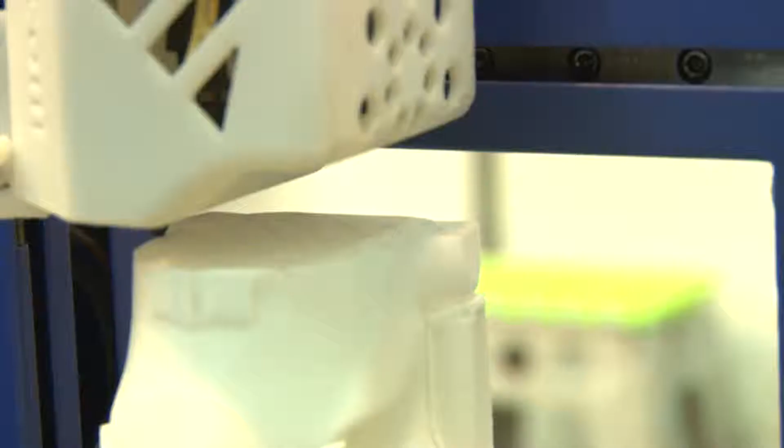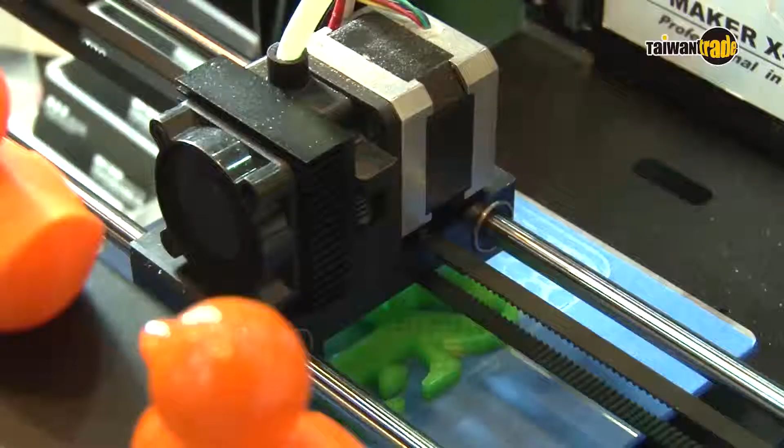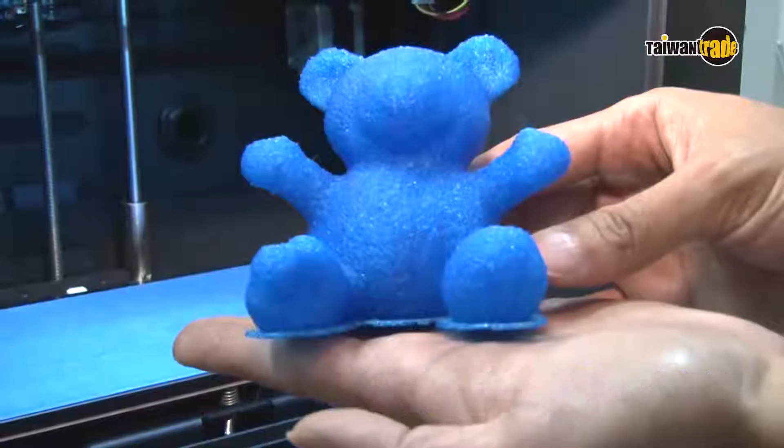3D printing technology's global popularity is actually due to economic factors. The technology itself has been in development for 20 to 30 years and is a key trend within globalization. Many countries exist to create employment for their people, and the best way to do that is through manufacturing.

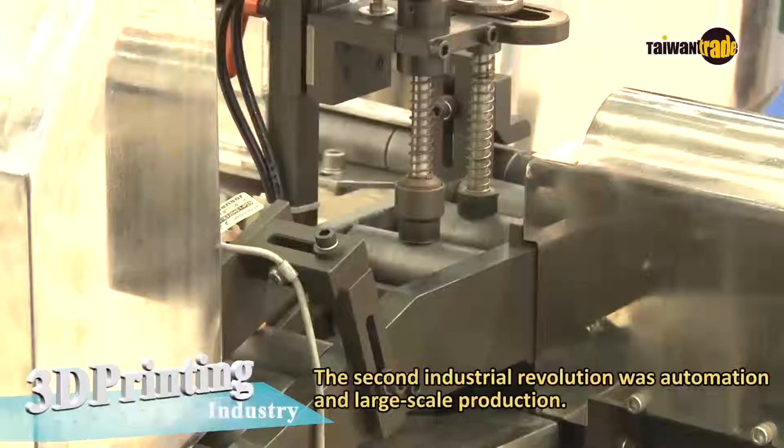The second industrial revolution was automation and large-scale production. Components are very similar to each other, so they are produced in the world's factory, like the mobile phone. But take false teeth - as every tooth has a different function, it is more suited to local production. 3D printing can completely automate the production of different components.

Manufacturing can also take place anywhere to provide local job opportunities. That is why it has so much global support - governments all want to provide their people with the most effective job opportunities.

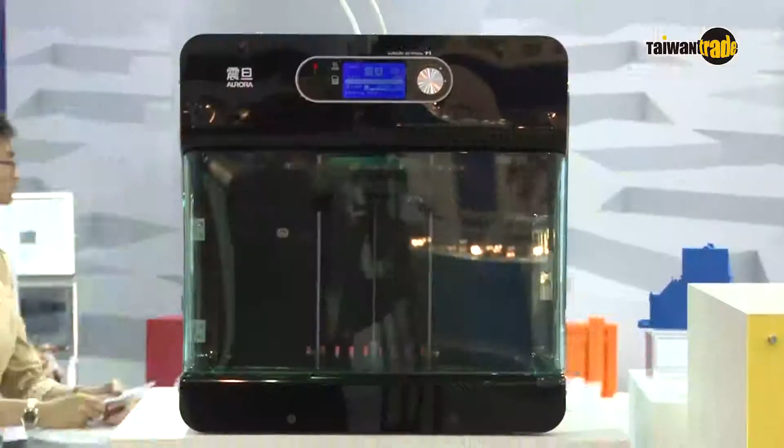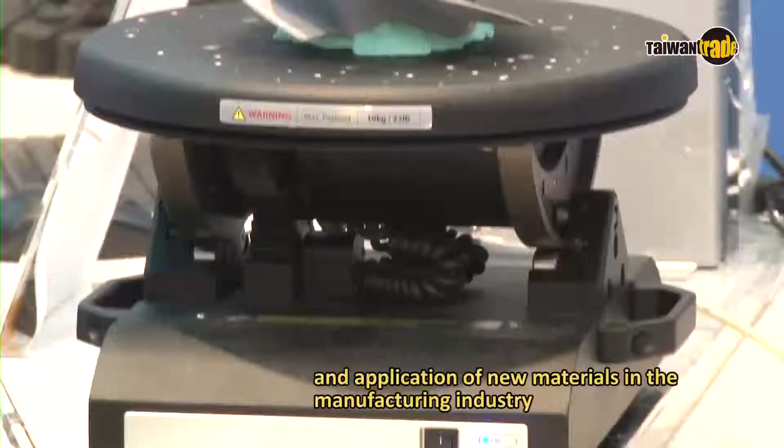Once the manufacturing industry shifts away from economies of scale, the digitization, socialization, the uniqueness of products, and application of new materials in the manufacturing industry will bring on a third industrial revolution. 3D printing technology will play a critical role in this change.

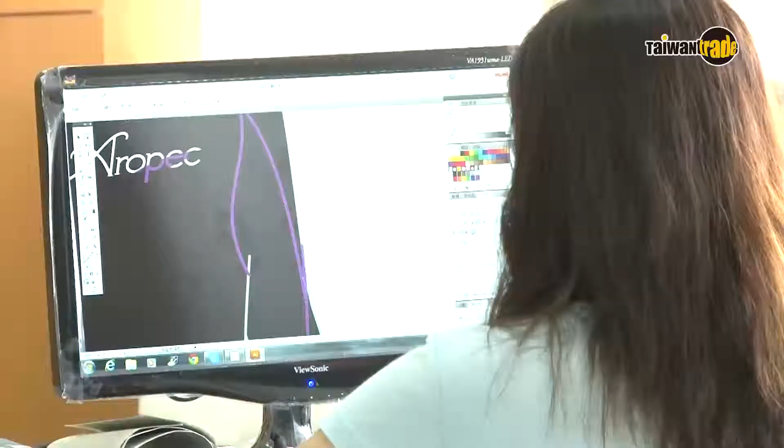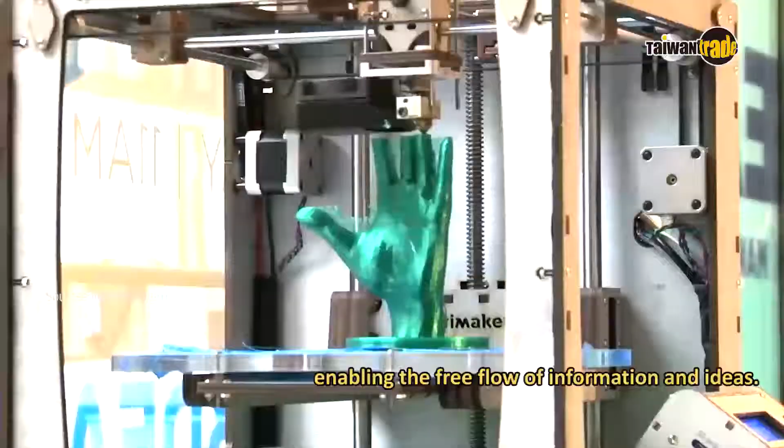During the information digitization age 20 years ago, the printer allowed data compiled on computers to be printed, enabling the free flow of information and ideas. Today, all industrial and creative products can now be given shape more quickly and more precisely through 3D printing by changing the printing material. By turning customization into self-manufacturing, everyone can now manufacture their own ideas.

We are a distributor for 3D scanning and printing technologies. Our customers are industries such as automotive, footwear, jewelry, and toys. Most of the demand is for industrial products. We have been in this industry for 18 years, and the market has kept growing steadily. The digitization of manufacturing means we already have 3D files, models, processing, and manufacturing.

In the past, parents sent their kids off to daycare or creative hubs to play with dough or Lego. Today's kids are practically born with a tablet in hand, and they play with so-called digital Lego and dough. Once all creativity is digitized, an output unit for digital creativity is needed, and that is where the 3D printer comes in. Our situation today is similar to 20 years ago.

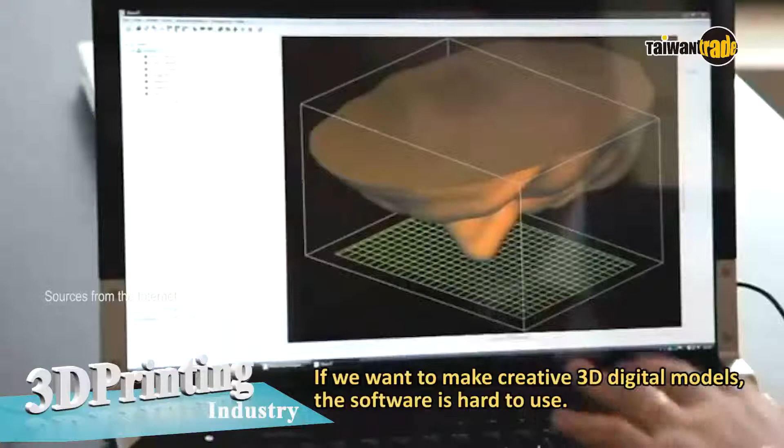If we want to make creative 3D digital models, the software is hard to use. This makes digitizing our ideas very difficult. When there was no output device for ideas, most people did not bother with making 3D digital models. Now that there is a need, we realize we do not have all the tools.

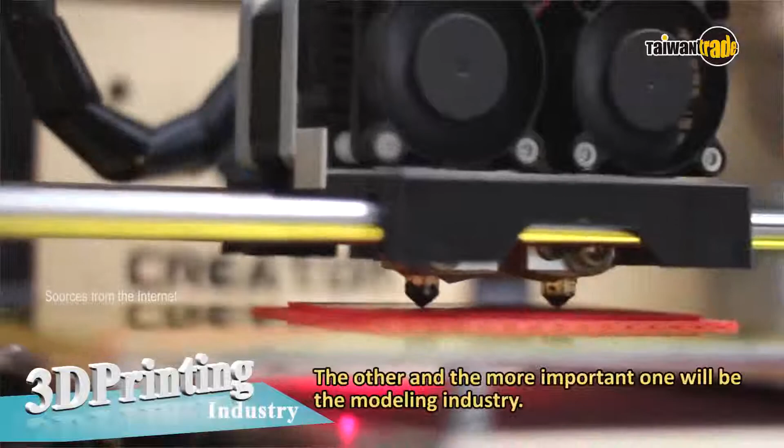So for the hottest industries in the next 5 years, we predict one will be 3D printers. The other, and more important one, will be the modeling industry. Apple has a patent for something similar - you draw a circle on the iPad, then pull it up by touching 3-4 points to make a cylinder. Pull it into a single point and you get a cone. That's basically playing with dough and Lego. Apple is already working on what we call rapid modeling.

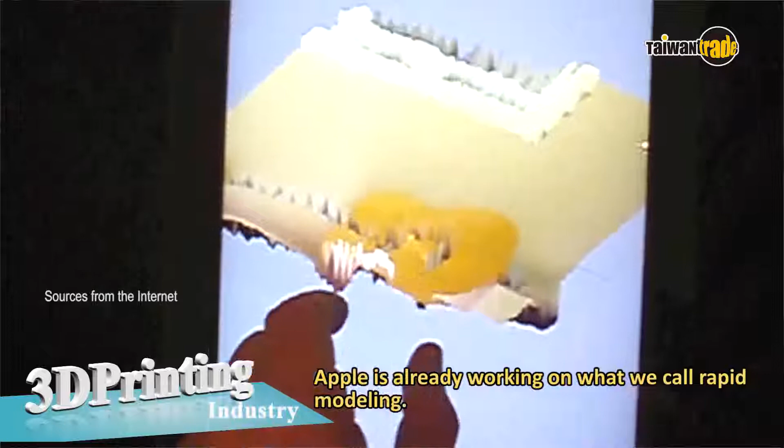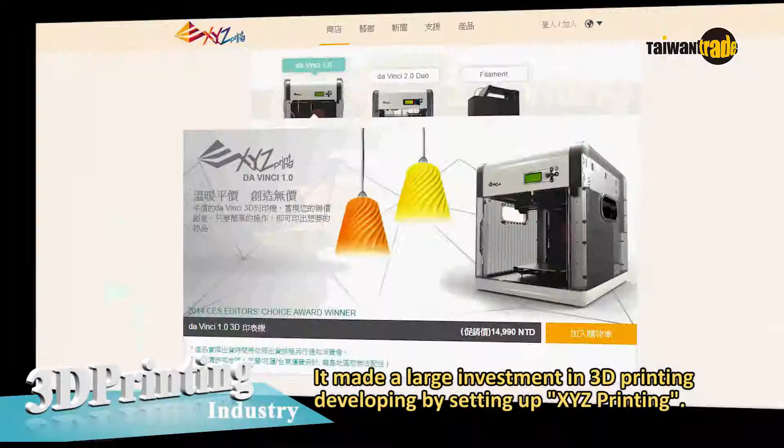In Taiwan, there are 3 public companies that entered this industry relatively early. The largest is the New Kinpo Group. Its turnover is over 800 billion, and New Kinpo itself is worth 300 to 400 billion. It made a large investment in 3D printing development by setting up XYZ Printing. Extensive investment over 1.5 years produced 4 to 5 machines.

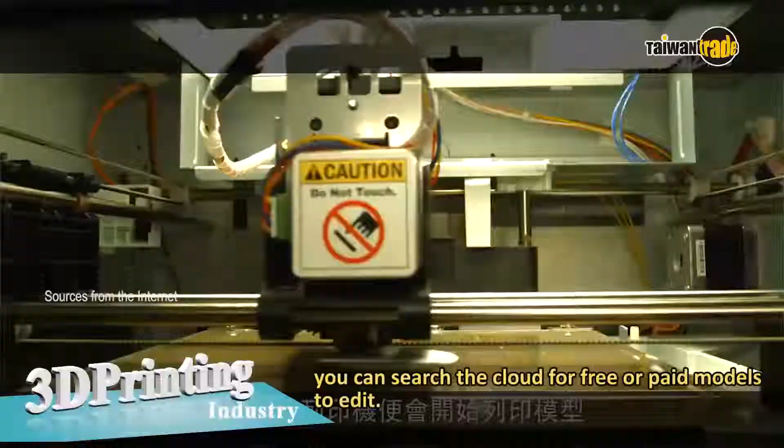And not just the machines either - it is also cloud-enabled, so even if you do not know how to build models, you can search the cloud for free or paid models to edit. This created a complete 3D industry chain.

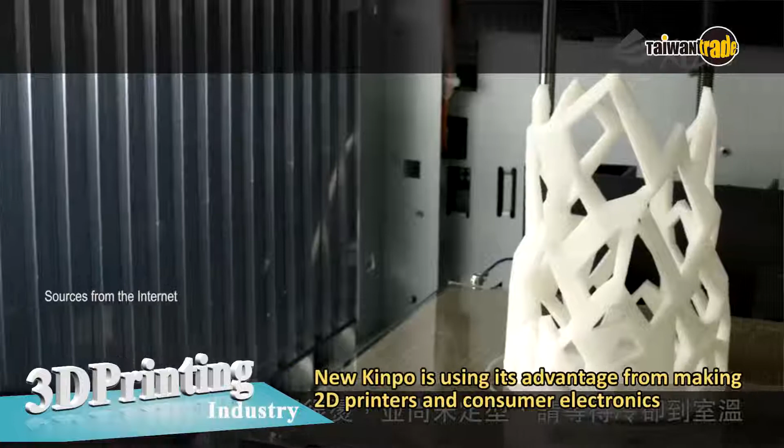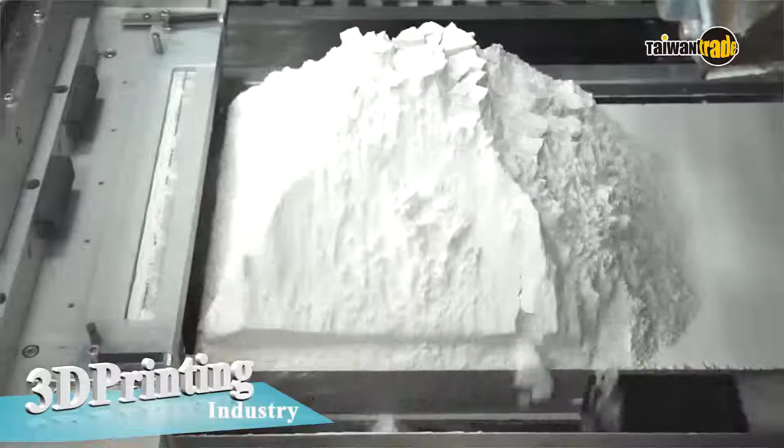The second company is Microjet. That specialized in making printheads for inkjet printers. They combined printhead, powder, and binders to create color 3D printers. Their business model is to focus on developing the China market. Apart from the huge market offered by China, China is also competing with the U.S. to become the industry leader.

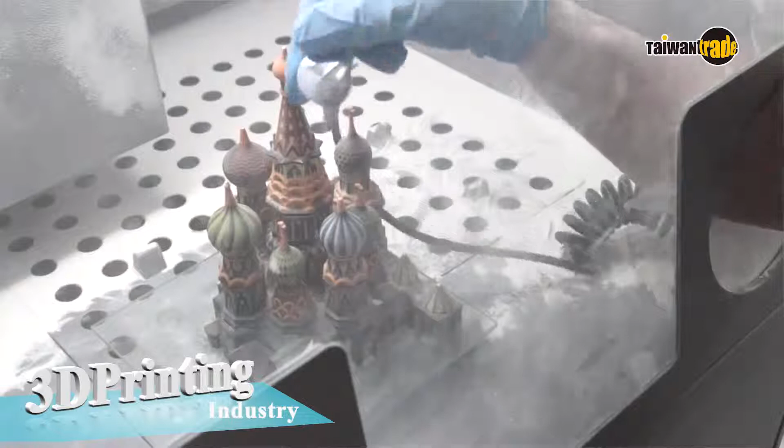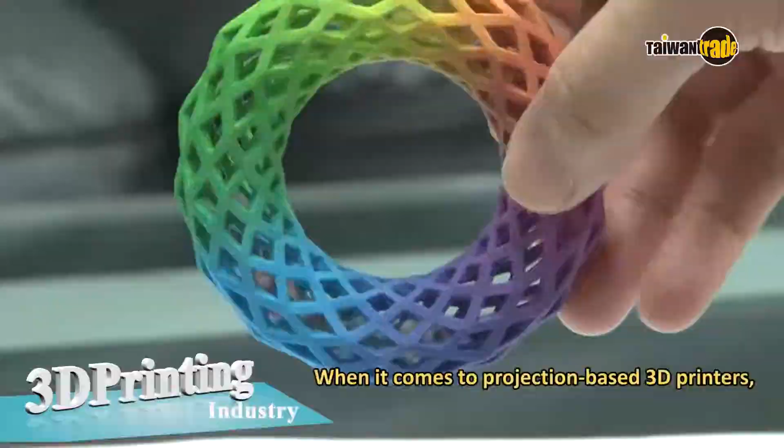About half of all projectors in the world are probably made by Coretronic. When it comes to projection-based 3D printers, nobody does it better than Young Optics right now. It was probably the first to set up an automated production line for 3D printers. This guarantees quality and reduces price, representing the first step in the popularization of 3D printing.

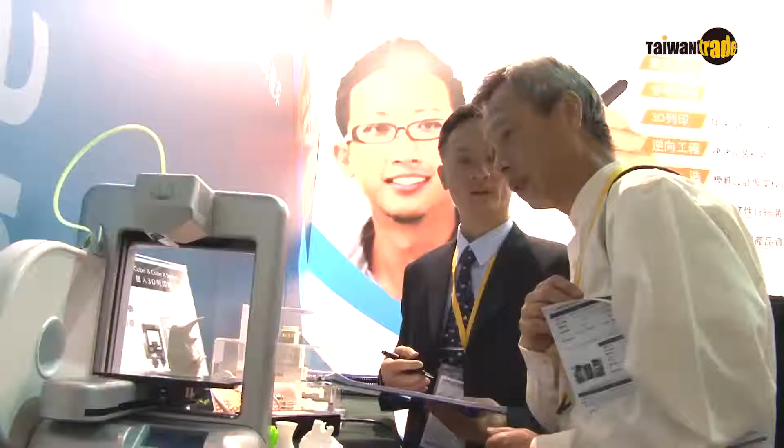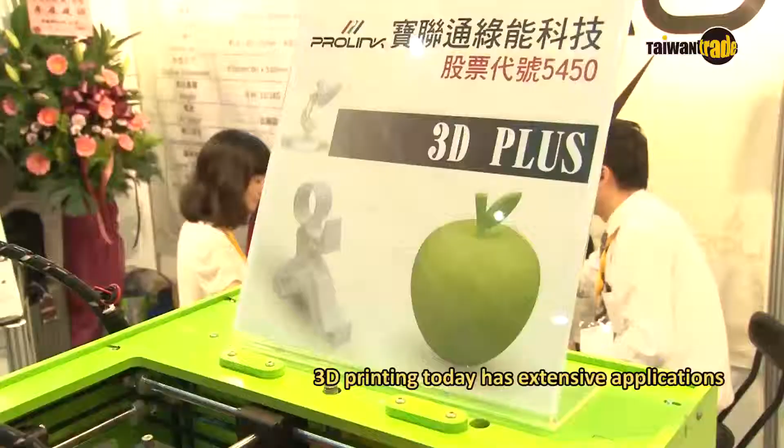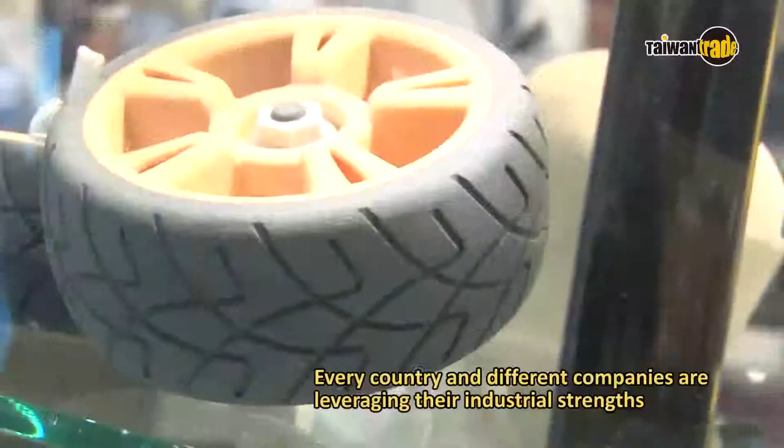3D printing today has extensive applications such as medical devices, aerospace, automotive, toys, and cultural creativity. Every country and different companies are leveraging their industrial strength and specializations in a rush to invest in 3D printing.

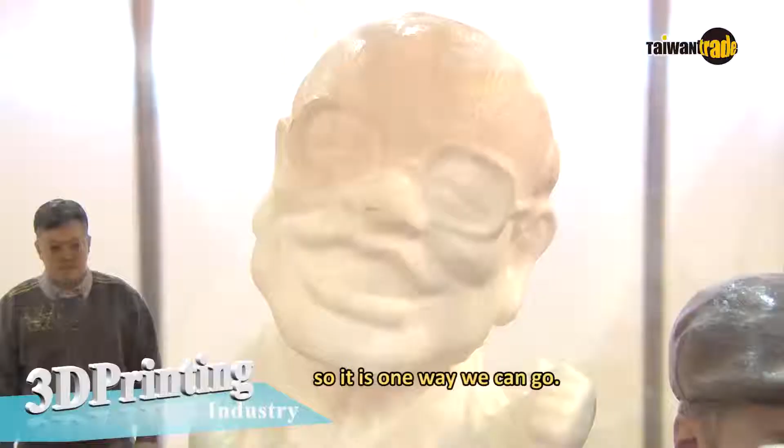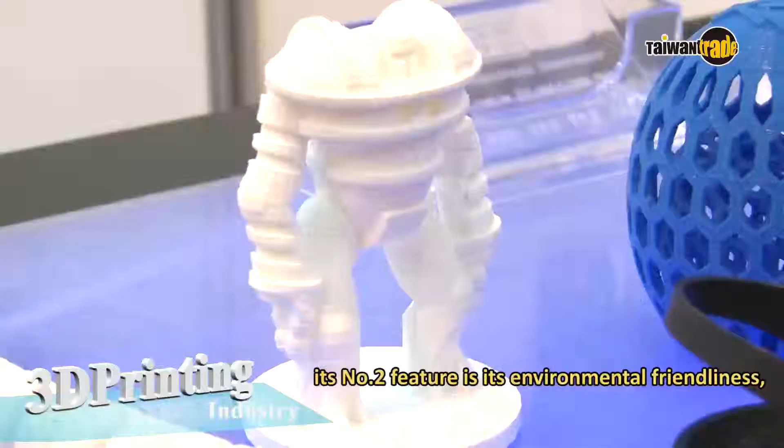This cultural creativity industry combines customization and originality, so it is one way we can go. Our 3D printer uses A4 paper as the output material. Its number one feature is full color. Its number two feature is its environmental friendliness, and the number three feature is ease of access. Our machine makes it very strong and hard as well.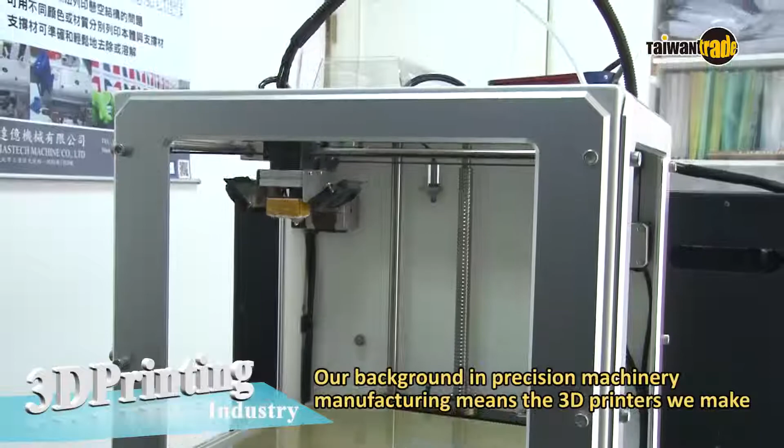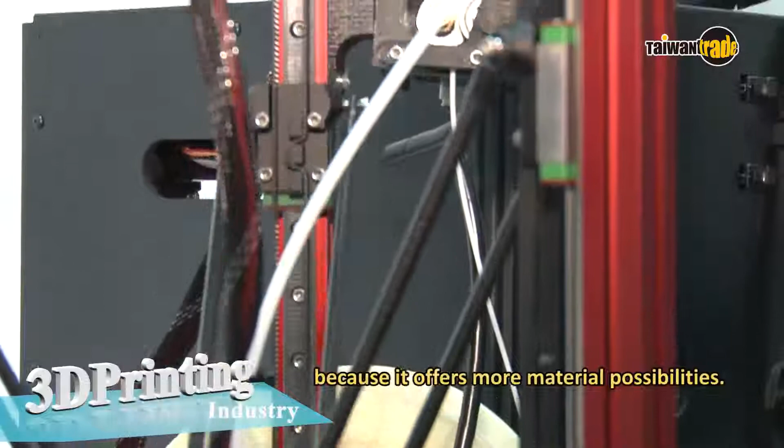Our background in precision machinery manufacturing means that 3D printers we make will be more precise than other manufacturers without our background. Our production is currently focused on desktop models because it offers more material possibilities. What we usually see is PLA or ABS plastic, so the product is hard. Using different printing materials, our 3D desktop printer can make soft and flexible products like this.

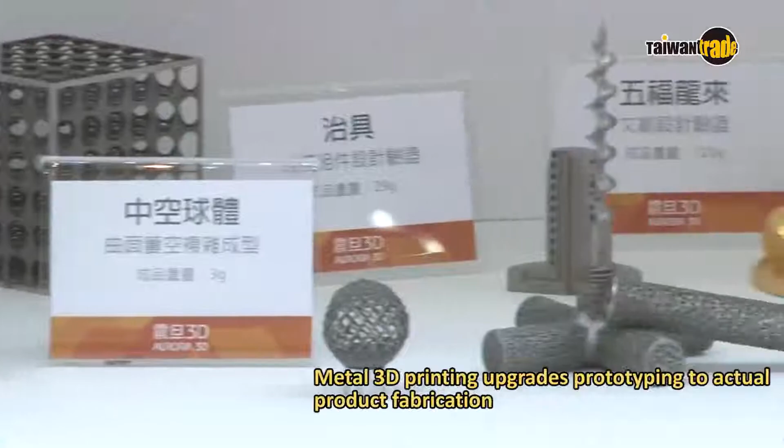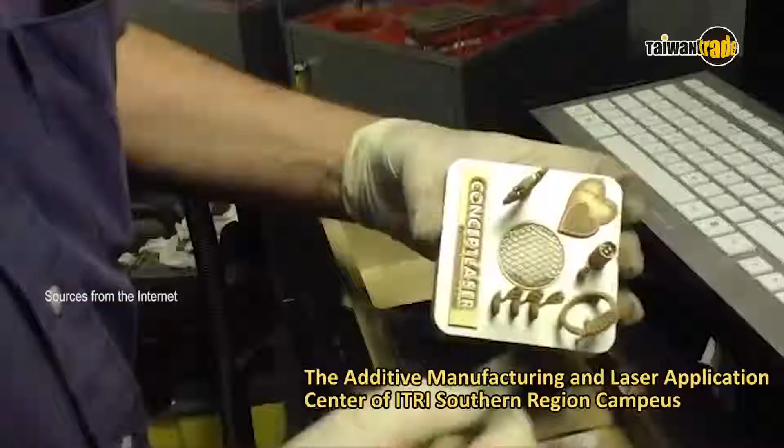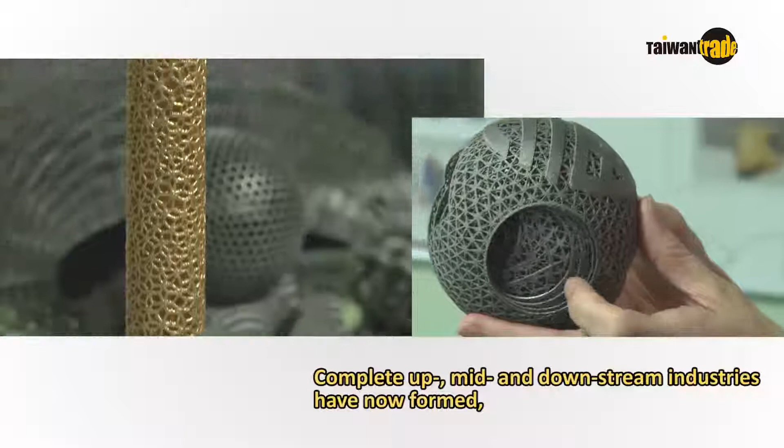Metal 3D printing upgrades prototyping to actual product fabrication, so it should boost industry value. The laser is the key in additive manufacturing. The Additive Manufacturing and Laser Application Center of ITRI Southern Region Campus focuses on metal 3D printing. Complete up, mid, and downstream industry have now formed, creating a laser additive manufacturing industry cluster for stimulating the growth of 3D printing in Taiwan.

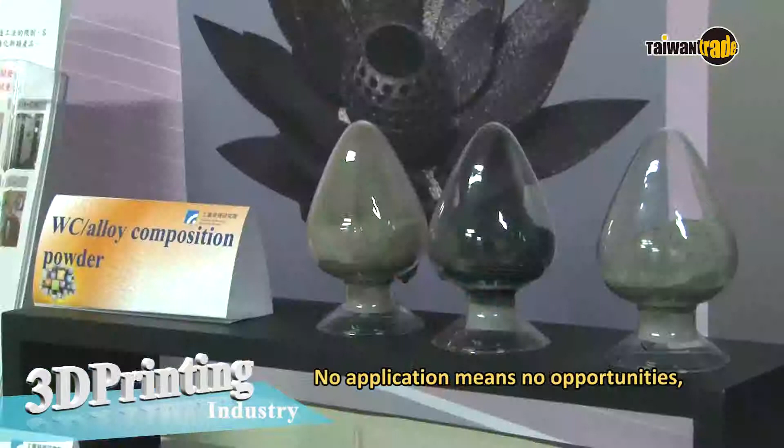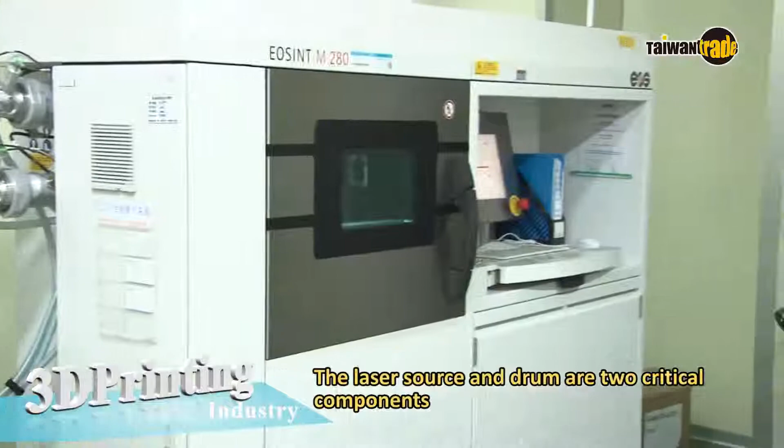The success of any industry depends on its applications. No application means no opportunities, so a key application is essential. Take an industry like laser printer manufacturing. The laser source and drum are two critical components that together account for over 60% of the product cost. Their profit margins are also very high. If we cannot make these critical components ourselves, we will be forced to buy these costly critical components from other people. Our profit margins on each printer we sell will be very slim as well.

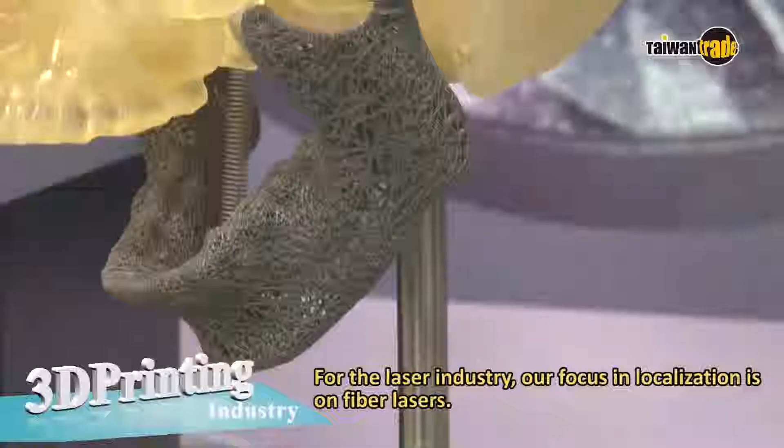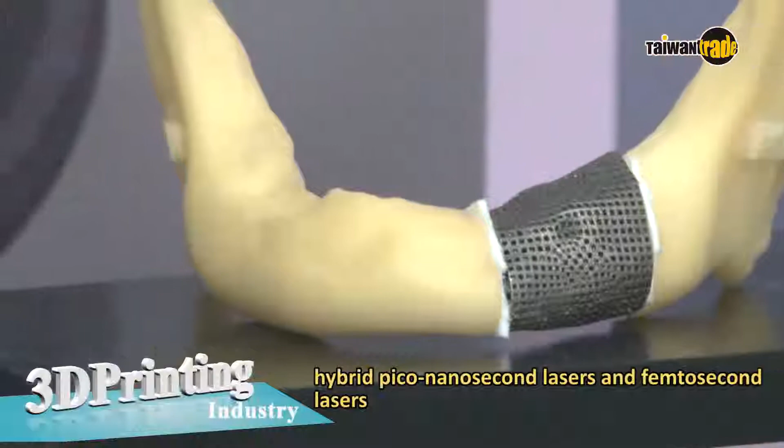For the laser industry, our focus in localization is on fiber lasers. Nanosecond lasers, picosecond lasers, hybrid pico-nanosecond lasers, and femtosecond lasers. We make all four types.

ITRI is the only place in the world to have made the hybrid pico-nanosecond laser with two pulses in one laser unit. Other countries need two lasers, one for picosecond laser and one for nanosecond laser. The light must then be combined to achieve this effect. With ours, a single laser can make two pulses. It can also be adjusted to put the picosecond or nanosecond pulse in front. This produces good results. It is also not as expensive as buying two units. So this is a really great setup.

We are promoting laser sources by supporting the creation of new companies. This year, for example, we helped set up Cyber Laser Taiwan Incorporated. We do this to build up support for critical components. By forming this company to produce laser sources, other companies will come and use it. We want to create a complete industry chain because the industry then becomes organic and alive.

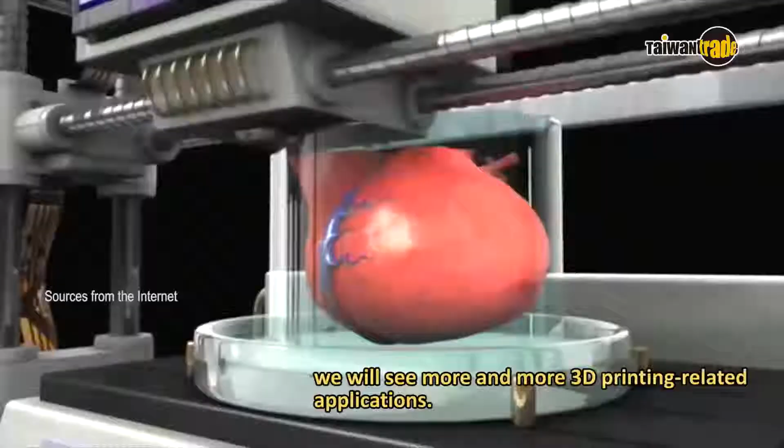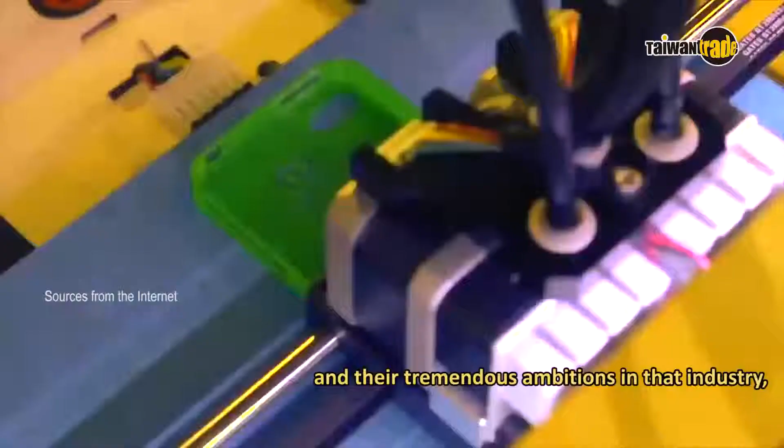In the next few years, we will see more and more 3D printing related applications. They will also become an increasing part of our everyday lives too. Based on the aggressive investment in each country and their tremendous ambitions in that industry, we can be very certain that 3D printing will herald the third industrial revolution and bring about strong global economic growth.